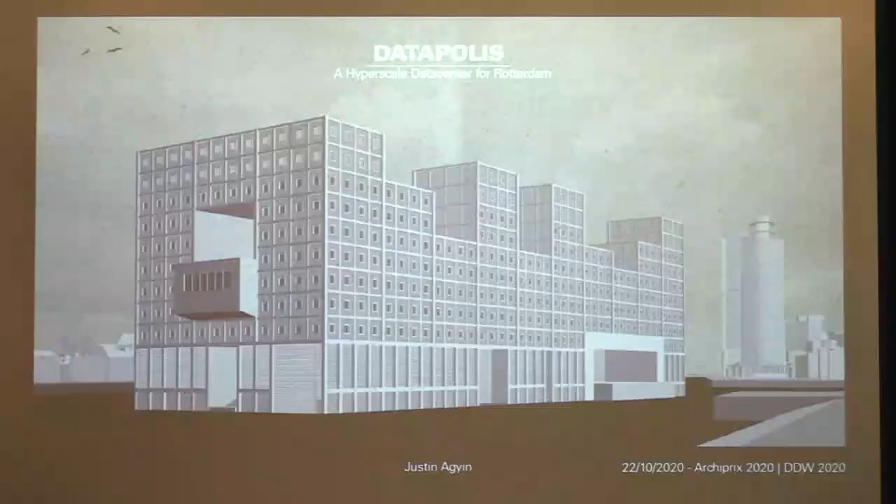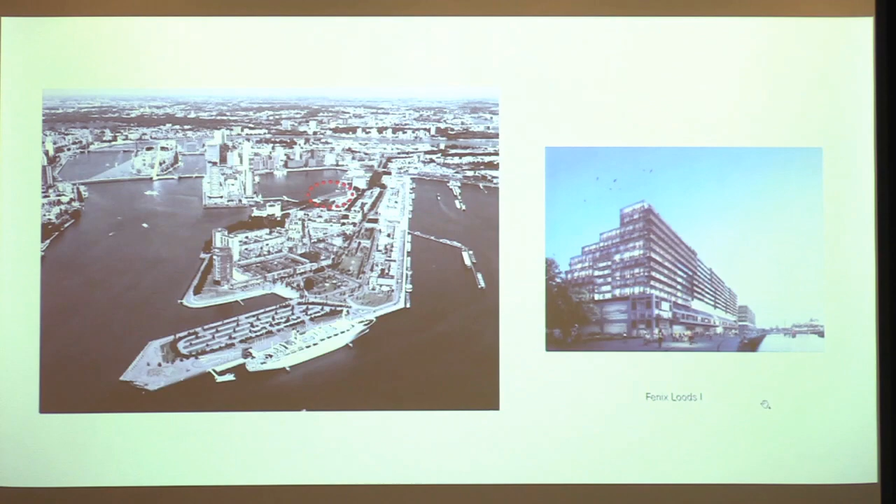And currently also Entree Katendrecht is realized, which is a high-scale and dense urban development near the metro station Maashaven.

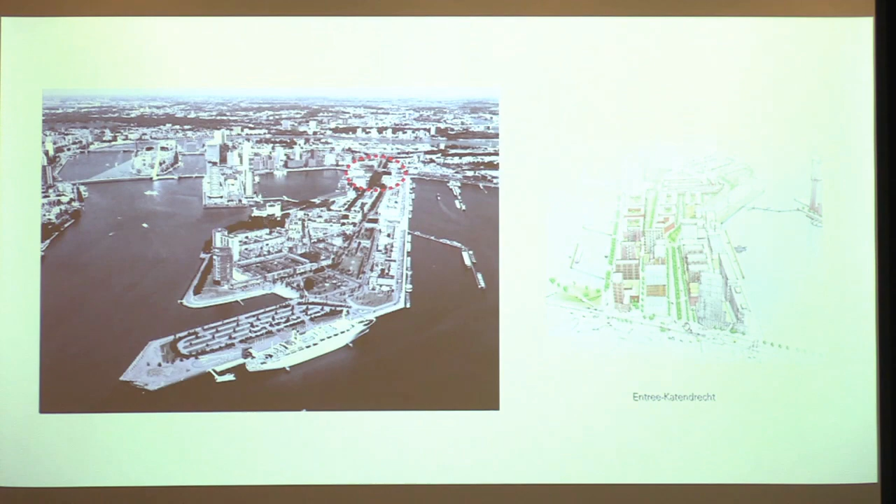What interested me in the location after research on Rotterdam and its relationship to water is how this piece of city actually was formed spatially but also socially, and how it's being transformed, and as I showed, the other half of the peninsula is still sort of up for grabs. It has been transformed over time gradually, but there were still some spots left that drew my attention.

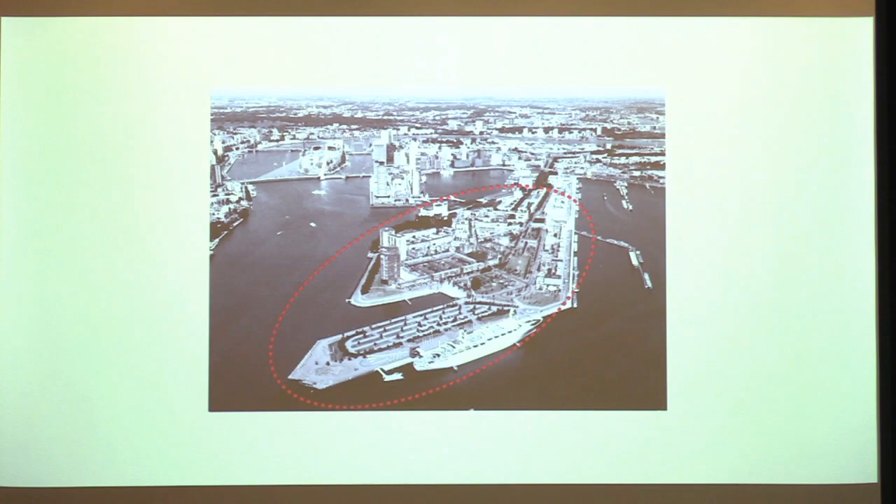So I tried to research how I could let the city, and Katendrecht in specific, re-engage with the water through architecture and the quay. And then particularly this part of Katendrecht, as the other part is currently being developed already.

What drew me, or what I found in the research, is that certain aspects of the water are very specific to Katendrecht, but also to the presence of water in the city, such as slowness, the vastness, the isolation and distance, and the stillness that it provides, and that the quays have a sort of pressureless quality to them, that everything is possible, but nothing has to take place per se. Which is a quality that stayed with me throughout the project.

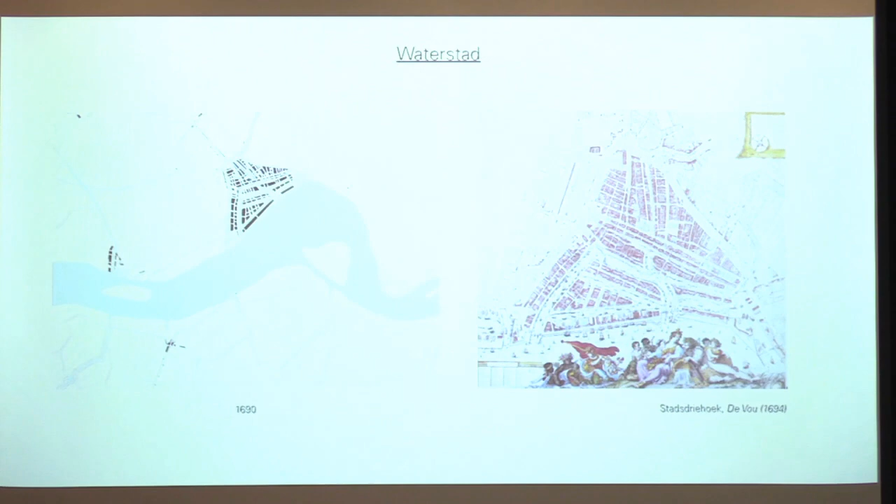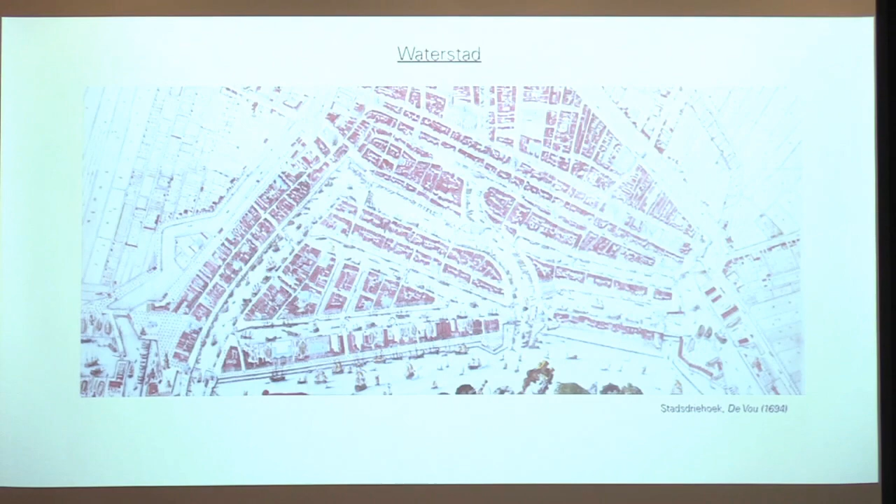How Katendrecht came to be was actually a radical transformation in the way port logic worked. It transformed from Waterstad, water city, which you can see here towards the end of the 17th century, that in the south part of the booming port city, there was really this mix between architecture, urbanism, and water. For instance, you see it here at the Boompjeskade, that you had a representative front towards the river, and then in the back you had shipyards.

And here you can see one of the most important public spaces of the city. Also the trade took place, the ships were there, and then here you had the representative front with the imposing architecture. Now the 19th century port was radically different in the sense that it was much more powered by machines, steam engine machines. These are grain elevators.

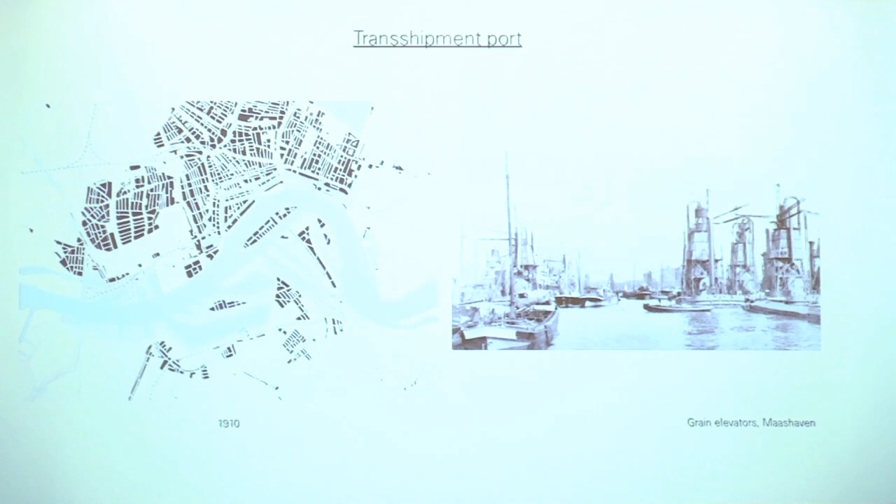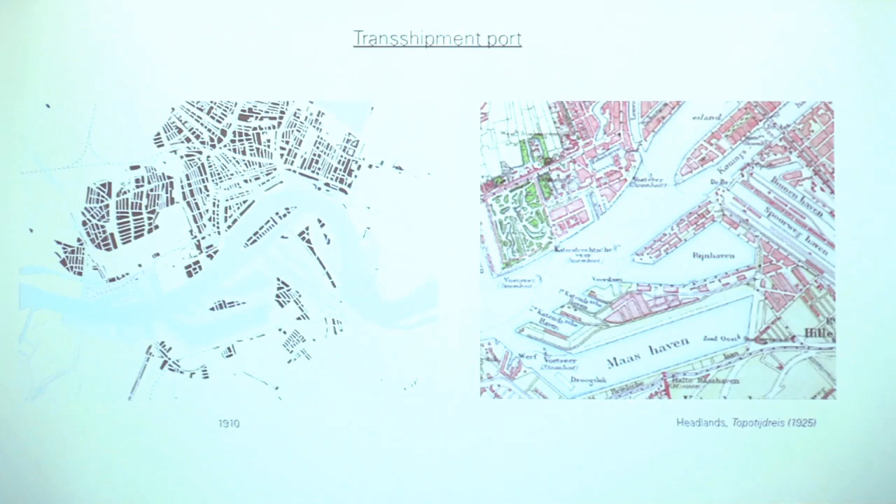And transshipment no longer took place completely between water and land, but also took place on water, and that's why they needed large water basins, and that's how Katendrecht came to be, because two large water basins were dug out, and then the peninsula was left, which was only connected to the rest of the city through a small path here or through the ferry.

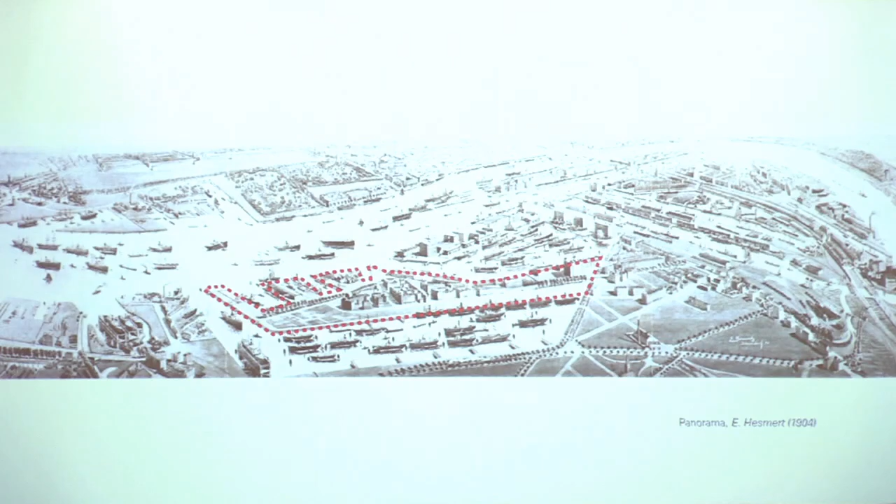Here you can see it in a panorama of the southern side of the Maas River of the city. And in this photo you can clearly see how Katendrecht as a neighborhood became an island isolated on a peninsula and was encapsulated by all kinds of port infrastructure and activities.

Over time this became not only a geographical periphery of the city, but also a societal periphery, because things like prostitution, gambling, opium use, and other activities that were sometimes tolerated but happen in any large city could take place here. Katendrecht, as a spatial location, allowed for those things to occur.

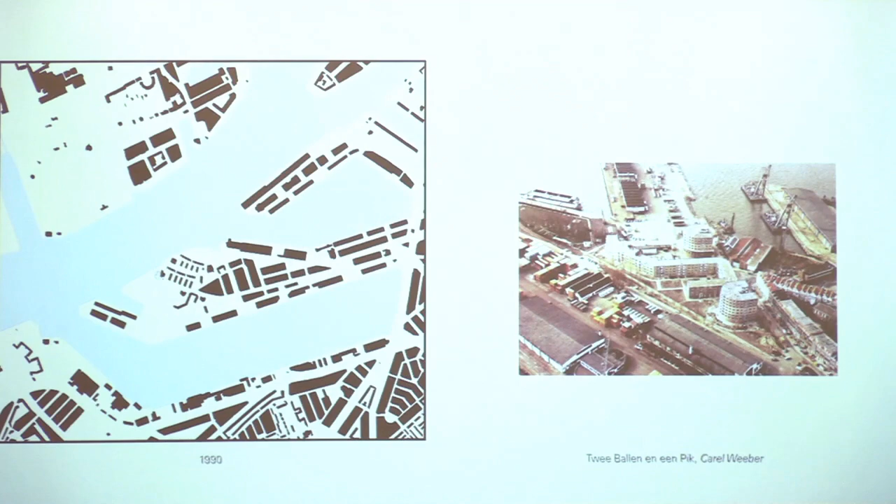However, the people living there eventually no longer tolerated this and wanted transformation. That's what gradually happened, starting towards the end of the 1980s. Transformations occurred and more residences were added, while port activities left — these were the first transformations. Then in the 90s and early 2000s, more transformations introduced new types of residents, usually people not necessarily affiliated with the port industry as was the case before in the historic core.

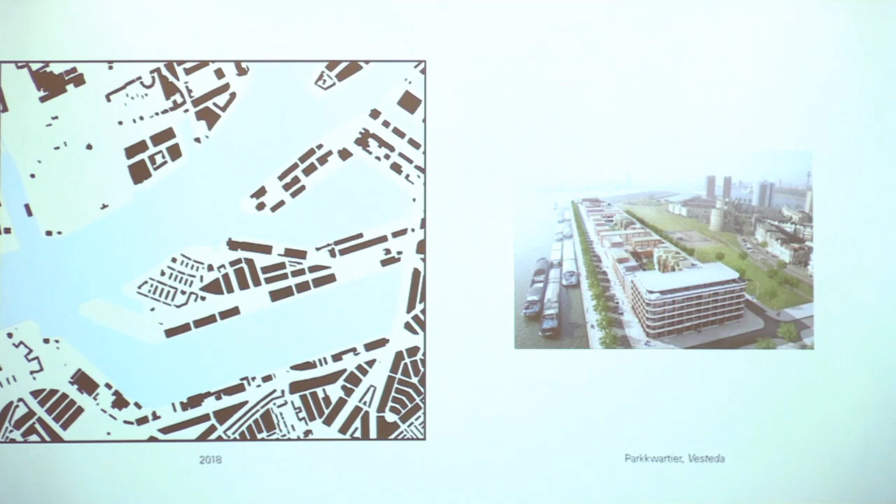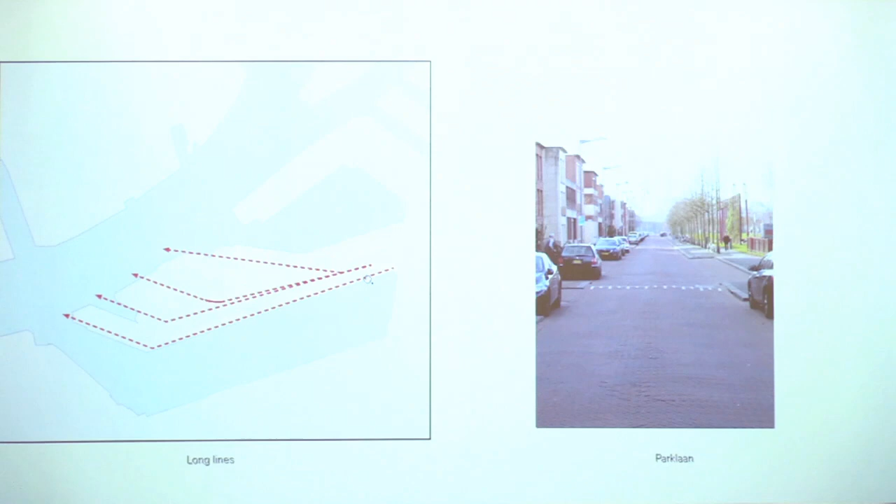These transformations spatially left an important mark on Katendrecht, resulting in morphological fragments. Between those fragments you have long lines of sight that were previously sightlines for the port infrastructure, mainly rail infrastructure, and perpendicular to that you have short cross connections.

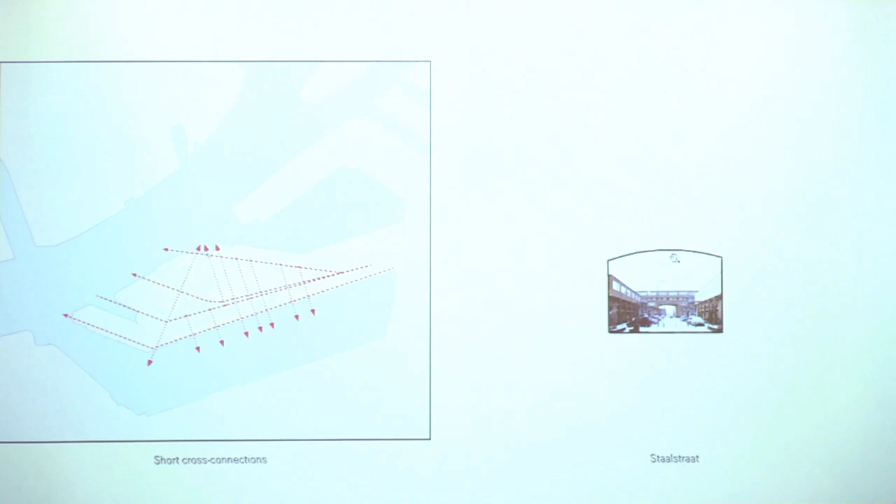The relationship between the urban and architectural situation is that sequentially you have this sort of encapsulated view provided by the architecture. As you move on, it starts to open up, and towards the edge of the peninsula you have these horizontal panoramas.

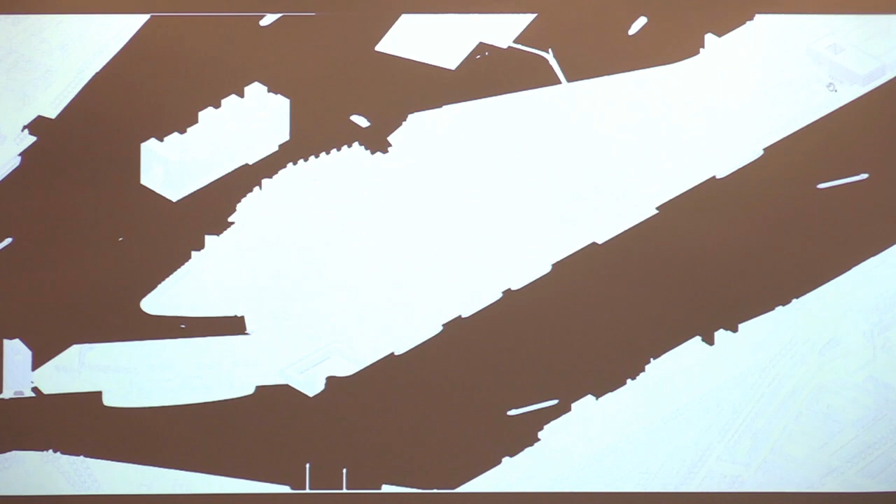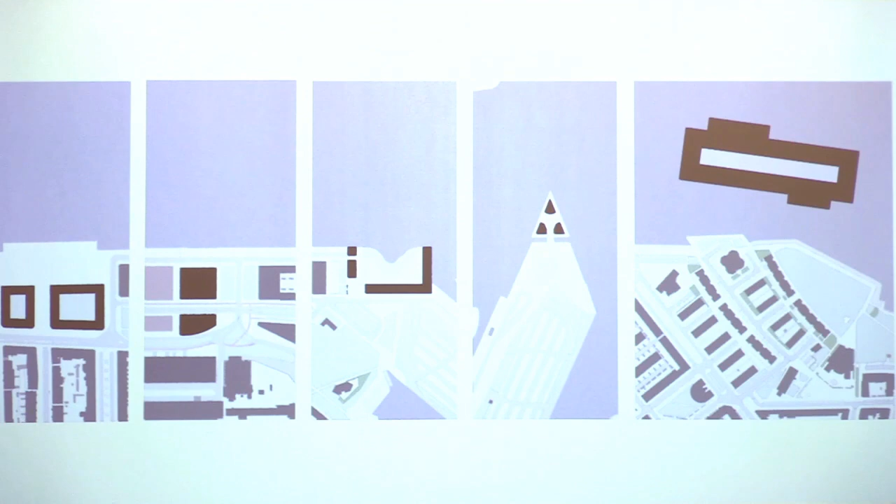These spatial characteristics of the location I tried to translate into architectural objects, introducing five objects between these morphological fragments that play into these characteristics, introduce a new program, and collectively migrate from land to water, from morphology to autonomy — together forming an urban strategy composed of five architectural objects.

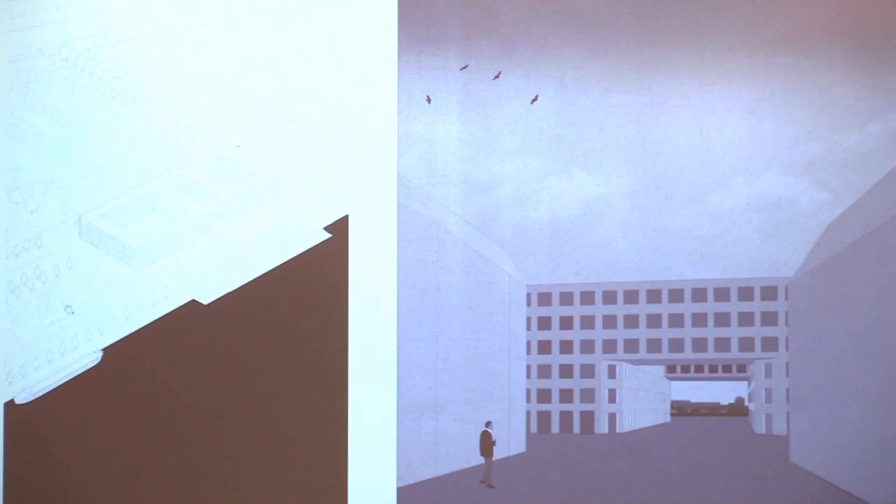Briefly, what they do is frame views towards the water and the remaining port activities there, and also introduce new program related to the context. For instance, this is a building block with residential units.

This is an office block that functions as a separation between this new development, the existing historic core, the developments from the 90s and early 2000s, and also this monumental grain silo, while also forming an urban square.

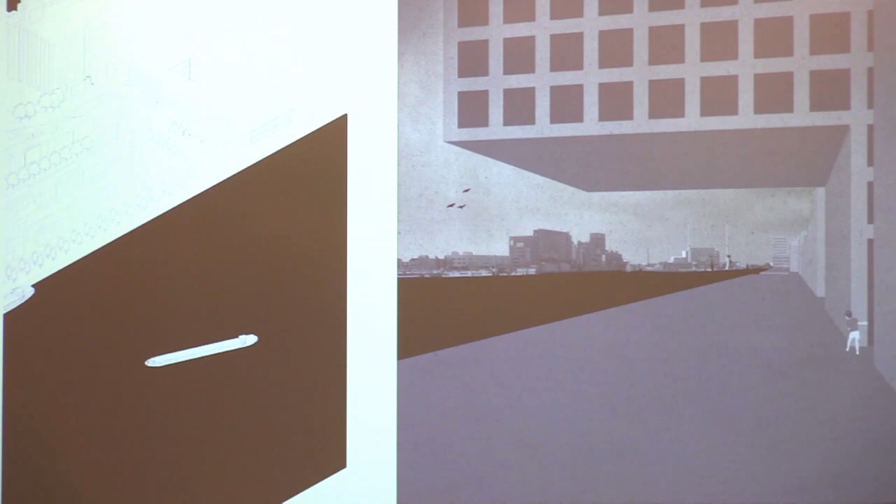Here is another residential building at this pivoting point between the residential area and the more open parking spaces related to the SS Rotterdam, providing also a soft quay so you can come closer to the water and enjoy it.

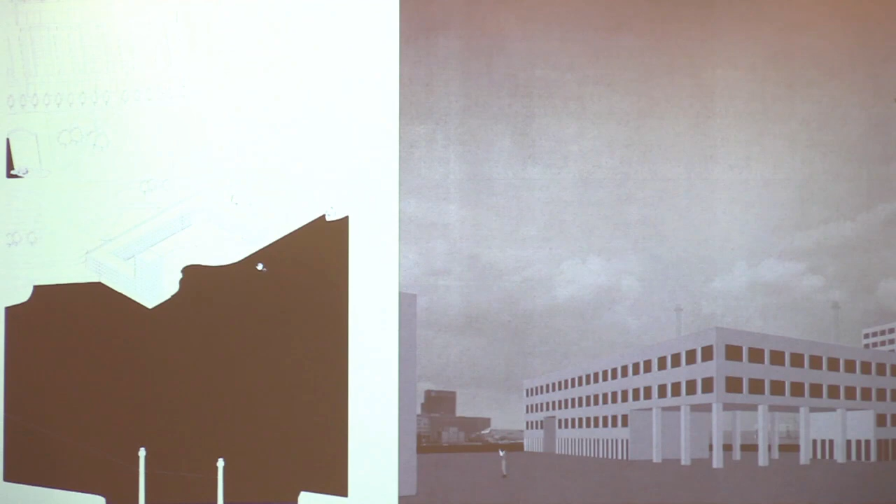Here at the tip, I completed the tip, and in the base of the building there's a water terminal where ferries, water taxis, and water buses can dock.

Through the building there's a cableway that goes from the Euromast to an amusement park, currently being built as part of this entertainment corridor through the city, also providing a new way to cross the water.

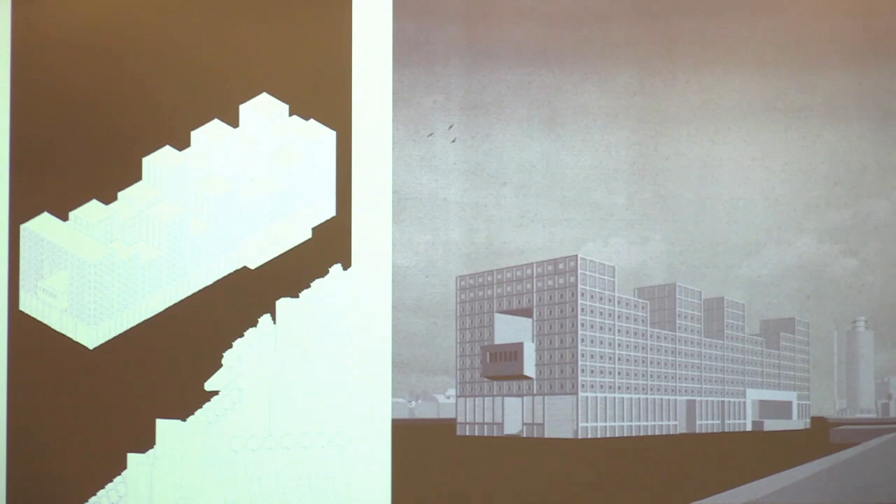Finally there's Datapolis, an autonomous building of 240 by 70 meters that houses a data center, a hyperscale data center, introducing a new type of industry in this former port area.

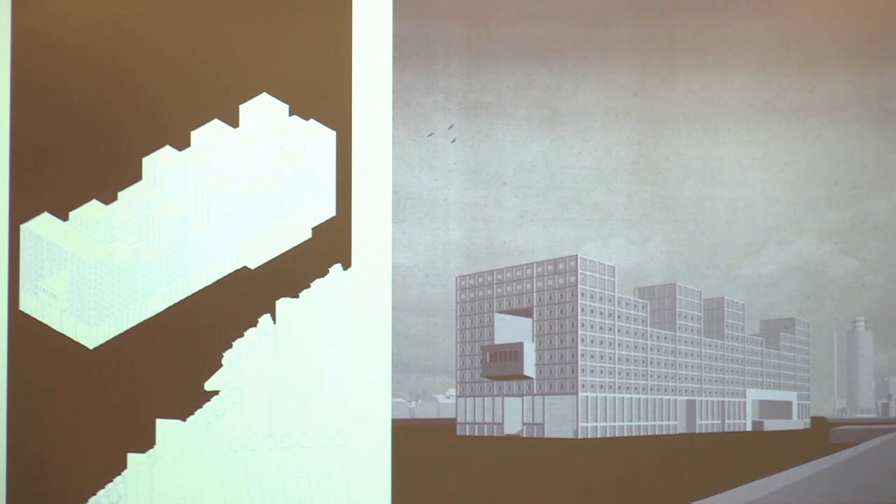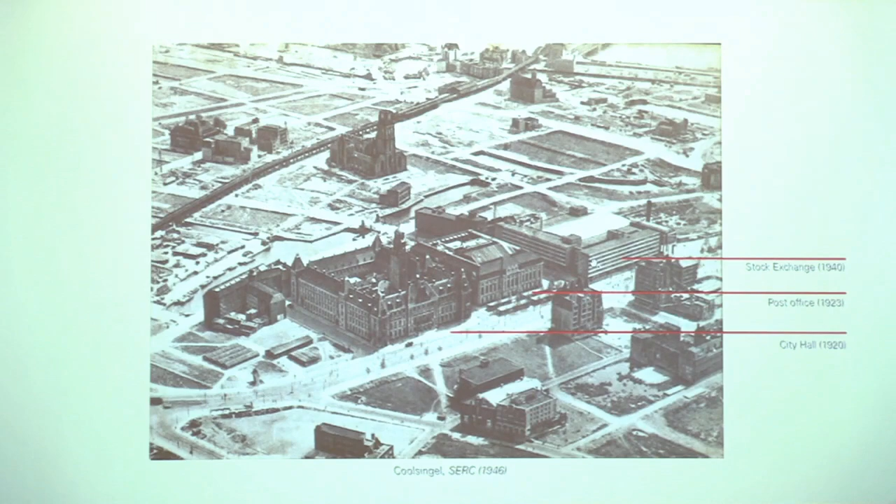One is the global interconnectedness manifested through architecture, which can be seen here along the Coolsingel, where you had the city hall, the post office which also housed the telecom and telegraph offices, and next to it the stock exchange. There are more examples in Rotterdam of how these global infrastructures and networks land in the city through specific types of architecture and buildings.

Another example is the Witte Huis, positioned at the corner of the river so that from each side approaching the city you could see it, also from the train. These technological infrastructures also provided new views and perspectives on the city, which were heavily used in cinema and other creative outlets.

Second is the collective celebration of technological progress. Rotterdam had a tradition of hosting, every five years, a large manifestation in the park, which is literally called the Park.

Rebuilding of the ports after the bombardment in the 1940s.

Then in 1955 there was a large manifestation on innovation in energy and chemistry. And in 1960 there was the Floriade, which gave Rotterdam the Euromast, a celebration of technological progress in the horticultural industry.

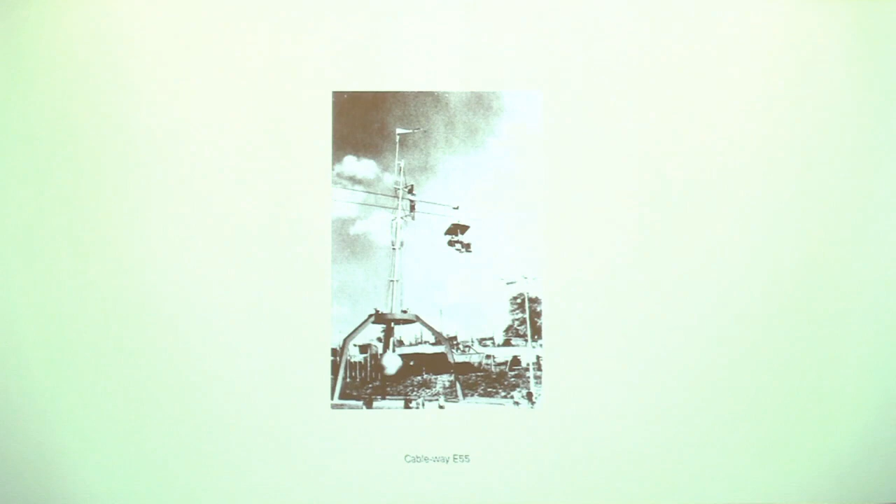Also prominent in the park was a cableway connecting north and south, which of course also resonates in my project.

The third theme is a bit more complex: emptiness. Even though the inner city has been rebuilt and is being densified much more now, there's still this quality or presence of emptiness in Rotterdam, which you can notice in a lot of places. It's entrenched in the city, in its architecture, but especially in its urban setup.

This had to do with the master plan, or basis plan, drawn up for the construction of Rotterdam's inner city, which was not a master plan in which parcels and building blocks were heavily defined. It was more about facilitating flows—offices, but also port industry and other developments—with quite a small role for housing actually.

But it also allowed for this connection to the water, the openness and vastness of the water. This was especially important to Van Traa, the designer of the basis plan. Later on it was of course blocked by new construction.

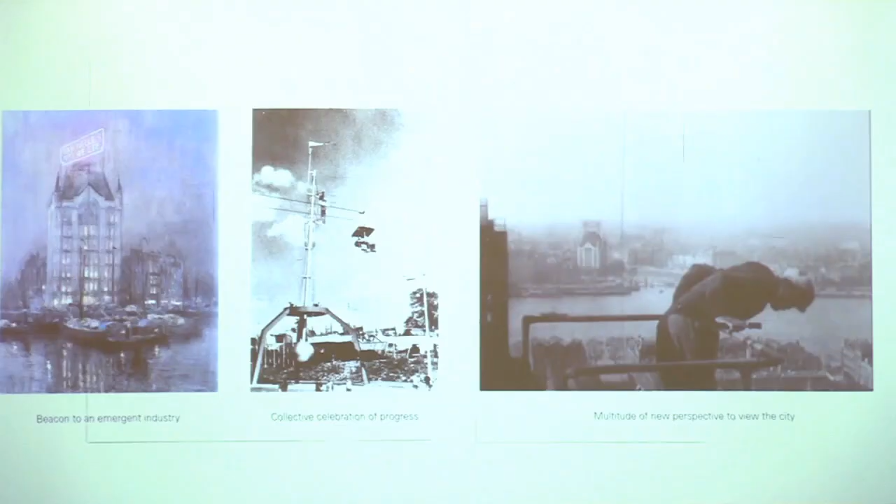So these were the three lines that led me to think about how this new industry, a data center, can benefit the city in different ways than only providing this new infrastructure, which is needed—we see it on a daily basis, but we can also hear it on a daily basis from all kinds of experts.

But it could also do something for the city: how could it be a beacon for this emergent industry, a collective celebration of progress, and offer a multitude of new perspectives to view the city?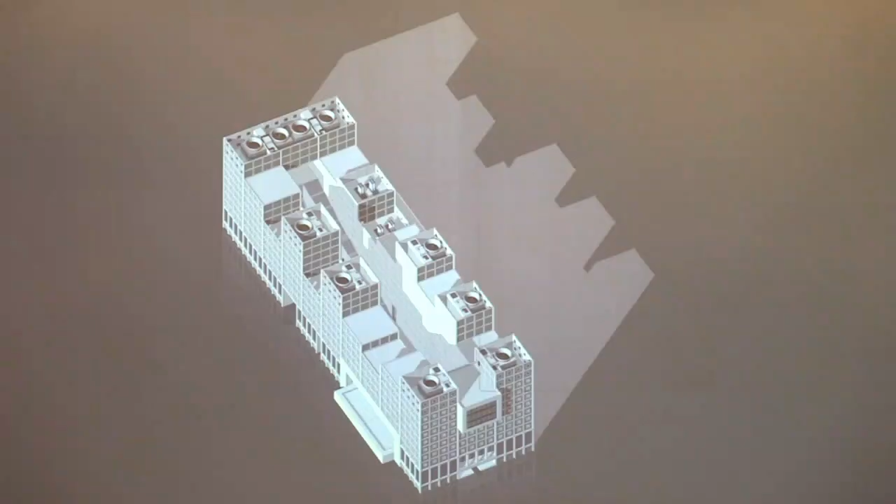So that's what I try to achieve through my design—a double role for this building, housing this new industry while providing new urban aspects in an architectural object. This is reflected here, for instance, in the plan.

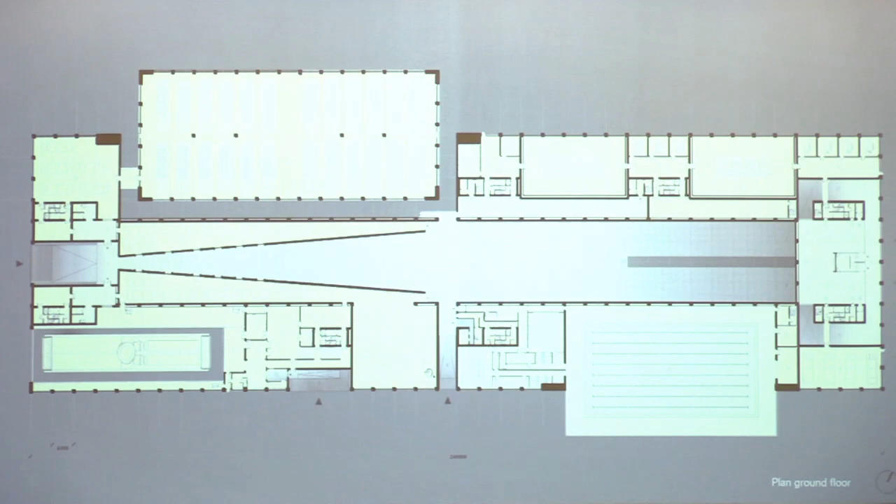I will briefly go through the technical aspects of the data center. Here is the ground floor plan: the loading dock, the generator room, air handling units, and power substation.

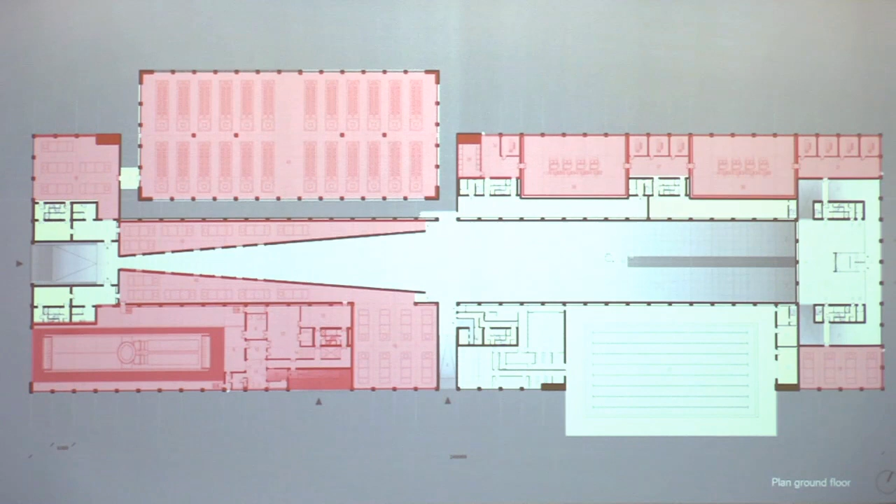The ground floor is mainly occupied by the technical apparatus required to operationalize this type of data center, with entrances on the north and south ends of the building, and also one on the side towards the central void, which I will discuss later.

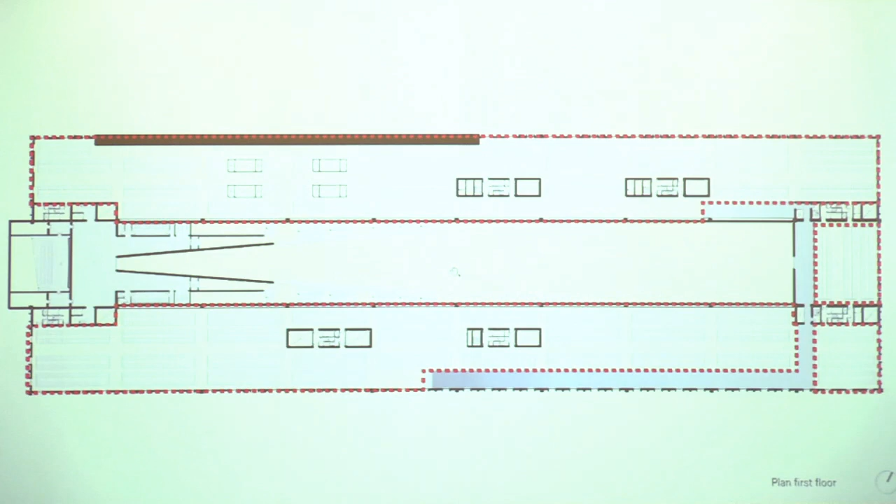This technological presence is also reflected in the building. In the base, there is a continuation of air vents, sometimes interrupted by an entrance. In the midsection you have large server floors, large open floors with server units.

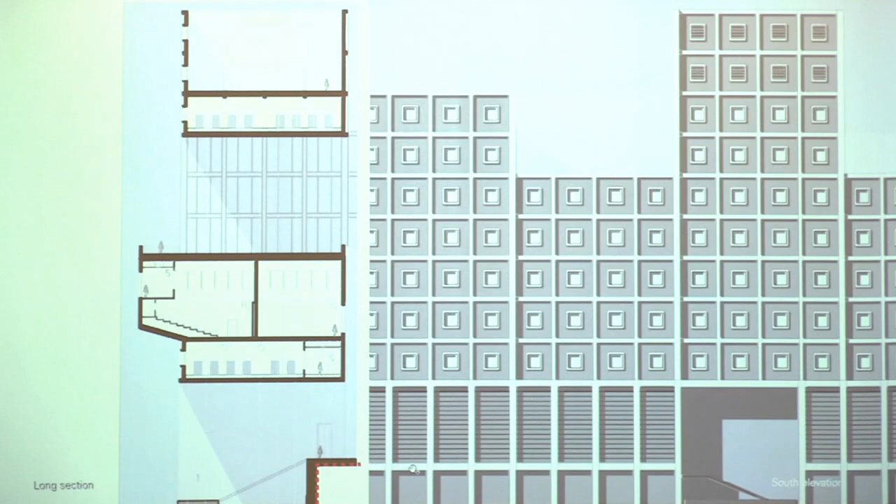In the top of the building, the top 2 floors occupy cooling towers, and you see air vents coming back there again, but smaller and encased. In the basement, there's also a water plant, because it's a water-cooled data center.

As I mentioned earlier, I tried to introduce the public domain in Datapolis so it becomes more than only a technical machine in the heart of the city. I did this in three ways.

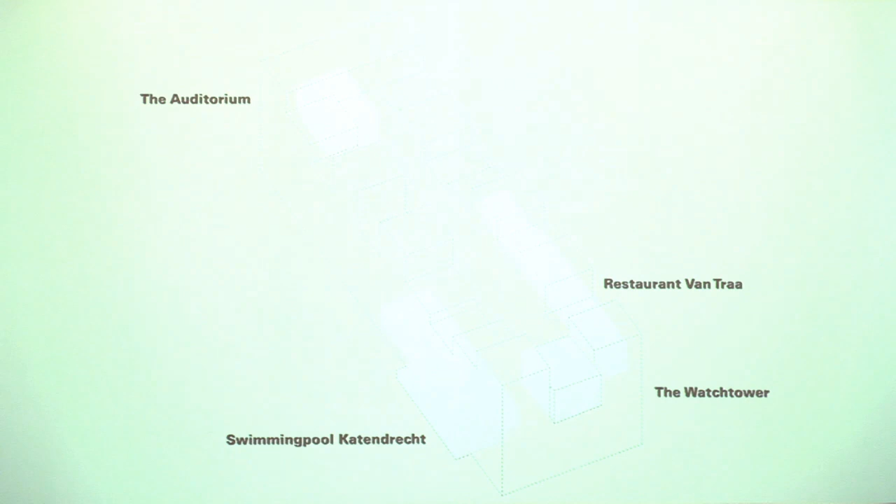One is through the introduction of four distinct public functions: a swimming pool, an auditorium, a watchtower—which has offices and a control room—and a restaurant. Each one protrudes through one of the elevations.

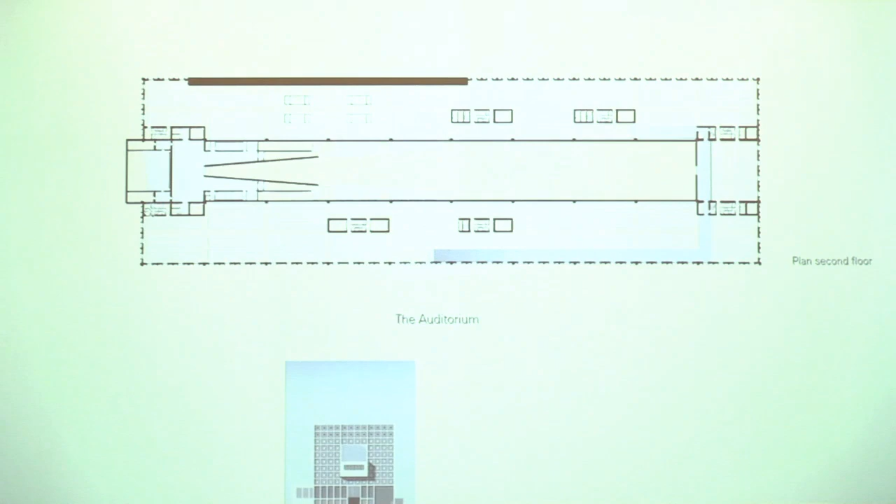Here you see the swimming pool on the ground floor. On the 2nd floor there's the auditorium, which you can reach through a monumental staircase in the center.

On the 5th floor you have the watchtower with offices and a control room, and then a restaurant overlooking the city, providing a view over the city in contrast to a view on the water, as was important for Cornelis van Traa—hence the name Restaurant Van Traa.

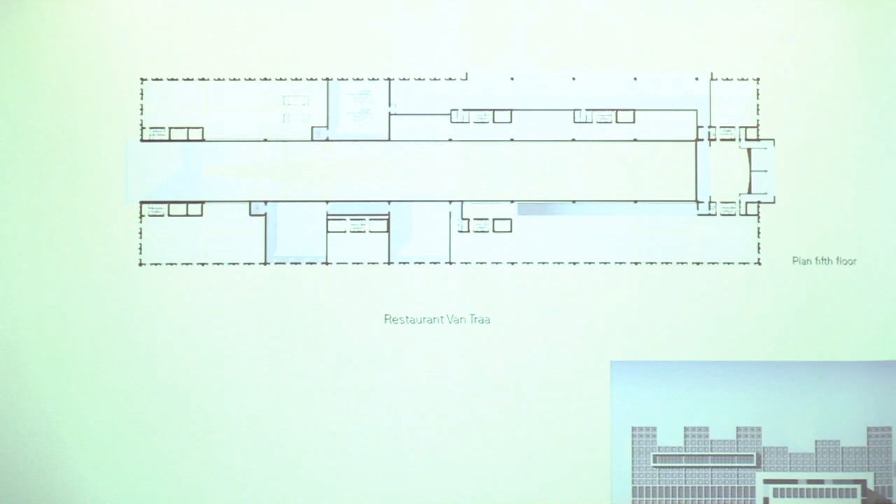These are connected through a public route—here is the swimming pool—and the public route also allows views into the enclosed spaces where you are not allowed as a visitor: the server spaces.

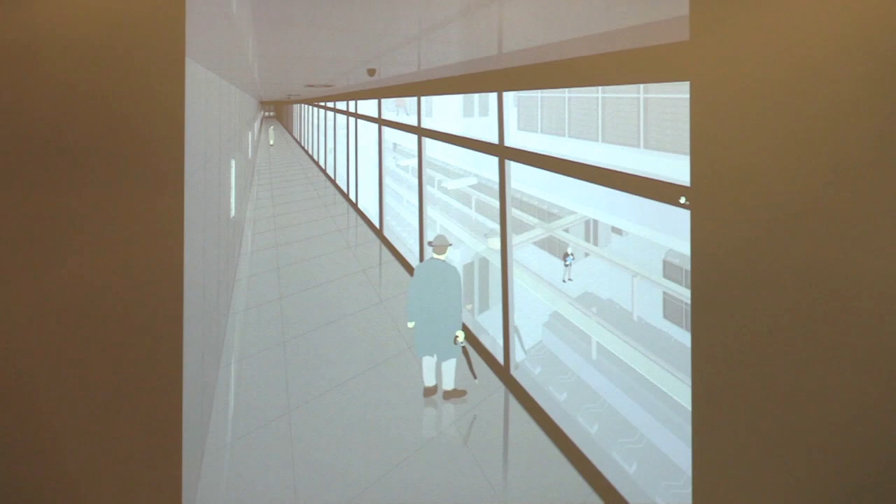Then you go to the auditorium, and here there's a large deck from which you can also again view the port in the distance. This is the control room. And then you end up in the restaurant overlooking the city.

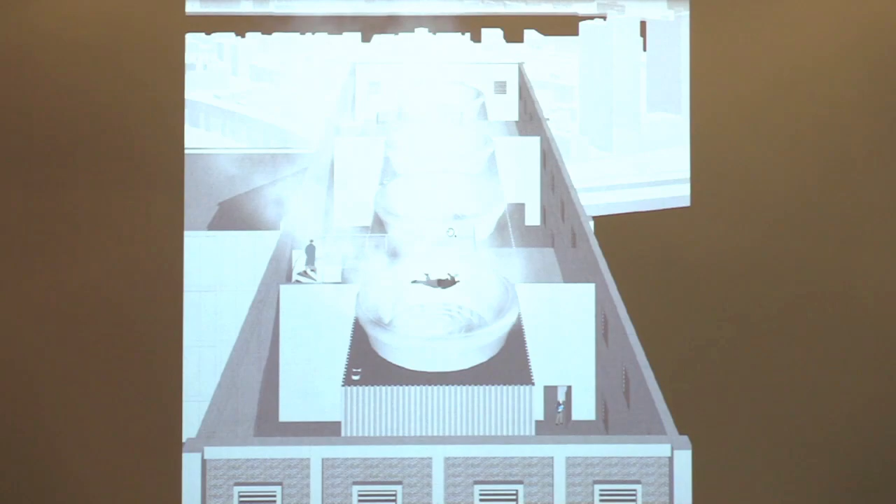You can from there go over the roof landscape and experience the cooling towers, and then revert back to the central void. And then the central void in particular is

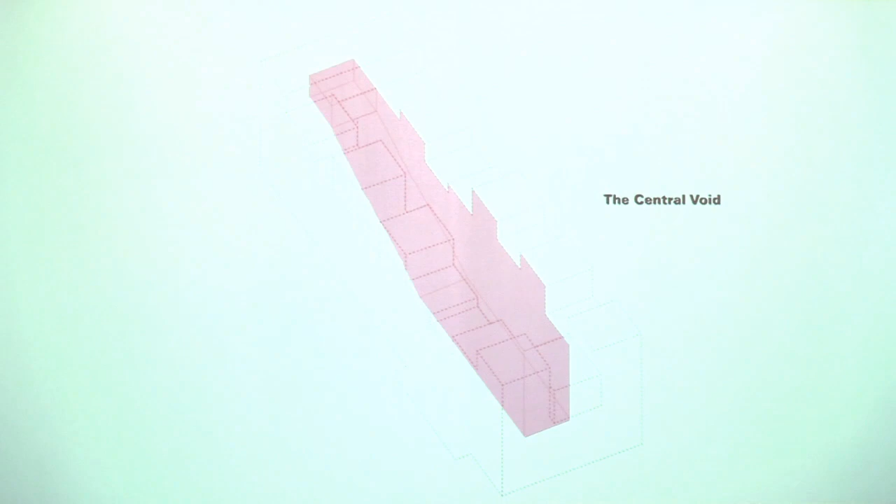sort of an antidote to this hermetic logic of a data center, in which everything is controlled climatically, but also who is allowed in and out. The idea of the central void is to be a poetic counter answer to that by offering a permanent public space in which everything can take place, but nothing has to, a bit like the pressureless quality that quays have in Rotterdam, some of which haven't been transformed yet. There's not necessarily a function there, but you are exposed to the elements, and it is permanently open without fences, doors, or gates. That was my presentation. Thank you.

There's only two of us, so it doesn't really echo the clapping, right? But thank you, Justin, for presenting your project. A little bit too long, but I guess we'll make do with that.

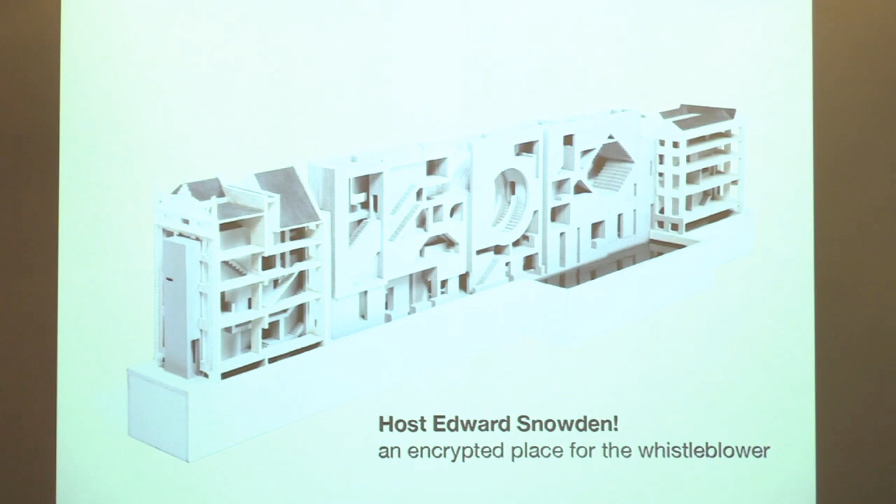Achterhuis has a new title in the meantime. It's called Host Edward Snowden, an Encrypted Place for the Whistleblower. That's because this will also be an entry for the Archiprix International, and Achterhuis might be a difficult word to explain, but I will come to that later.

For me, it all started with this documentary about Edward Snowden, Citizenfour — Edward Snowden, the whistleblower who revealed the reality of mass surveillance and data exploitation by our governments and trillion-dollar companies like Google, Apple, Verizon, Amazon. You can fill them in, which is of course a grave violation of our right to privacy.

This subject really fits into my own practice, which I started in 2015-16, and it's pretty much embedded in social, political issues, political context. So you can read my project as a spatial manifesto to address important terms like transparency and the right to privacy in a well-functioning democracy.

I'm not going to explain my whole building because I want to leave a secret, of course. I'm not going to explain exactly how it works, but believe me, I know the meaning and function of every space in my building. I'd like to talk this afternoon a bit about my process, because it's pretty important for my practice.

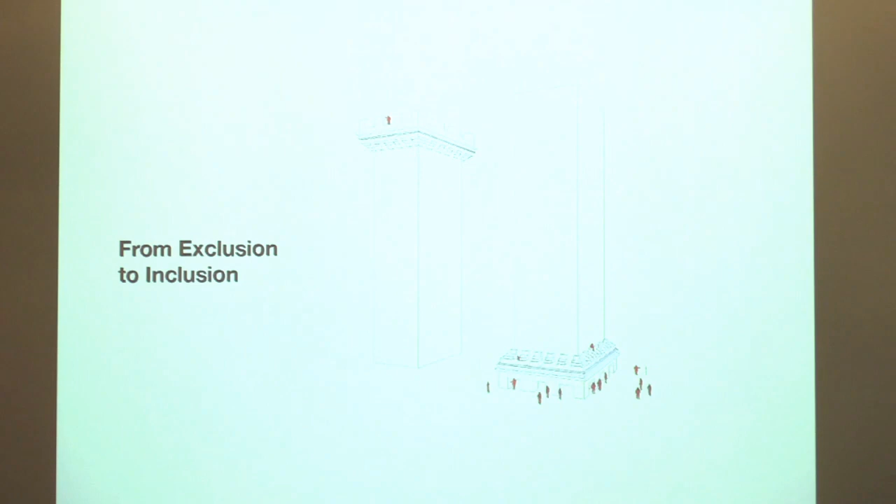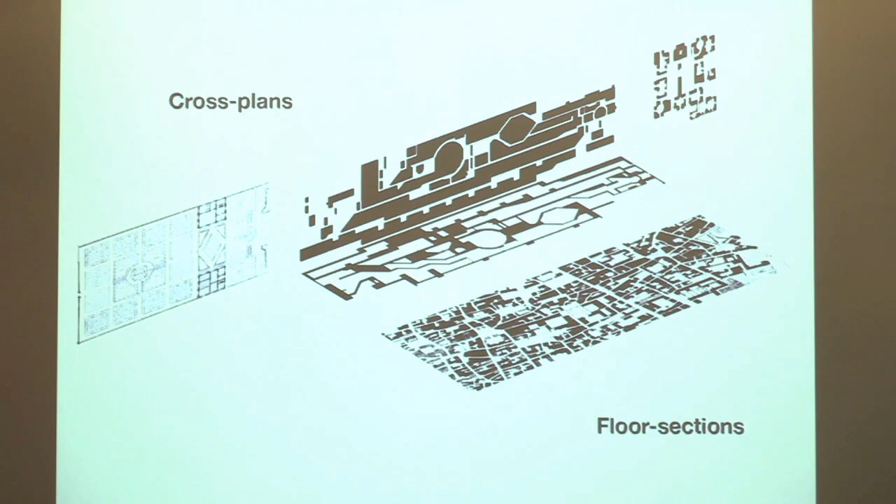Well, here, you recognize it again. Here it comes all together, and what I did is I was making my whole design on the flat surface, and then I rotated it 90 degrees, so a square becomes, for instance, a space.

This was a perfect occasion for something I never did before, but let's call it an academic exercise, a mass void study, by making matrices and molds and then casting with plaster and concrete. It's good to mention that at this point I didn't have a program and I didn't have a location. Maybe you're waiting, where is this building situated?

But it was more or less on purpose. I always want to start a project first with my imagination and an interpretation of the subject and certain architectural principles. Then later on in the process, I want to focus on the more practical and technical parts that also come with architecture.

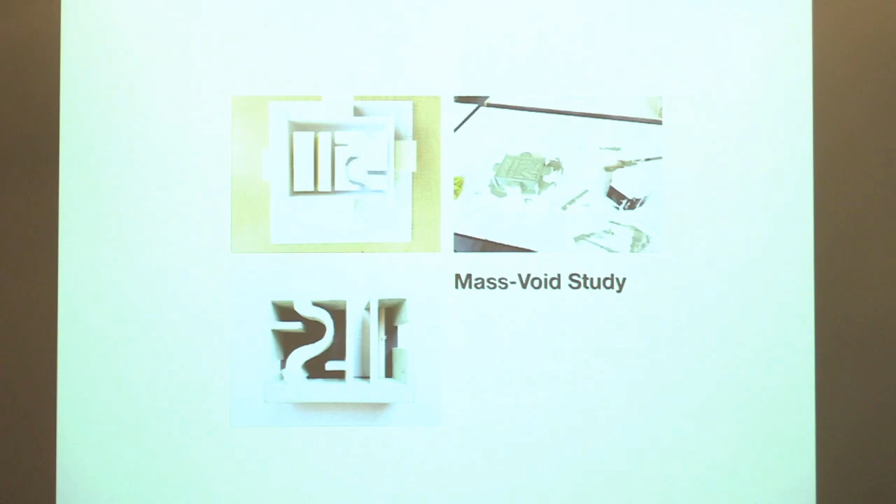Of course, it was not coming out of the blue totally. I already had ideas in my head about what kind of building I wanted to make. It feels a little bit like working as a scenographer or as a movie director with different scenes, and how they come together, that was something I had to solve in the end.

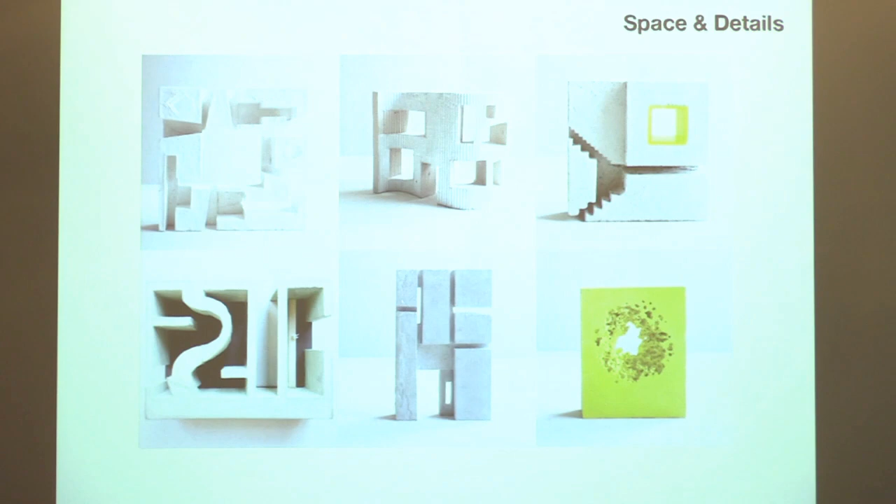So I started with different models, positive and negative, with sequences of spaces and disorderly organized spaces, and so on. I was exploring with this casting process, exploring as well spaces as details and materials.

In the end, I had quite a table full of models, building up an archive or a cache, as I called it, for myself, to analyze and look back at how I can compose a building out of all these elements. In the meantime, of course, I came up with a location and a program, but that came along with the casting process.

I'm just giving one example here, the circular space, which became the central space in my building. You can call it a belvedere because the public can go up there and take the stairs. You come onto a platform 5-6 meters high, and you have a very nice view on the garden where my building is projected.

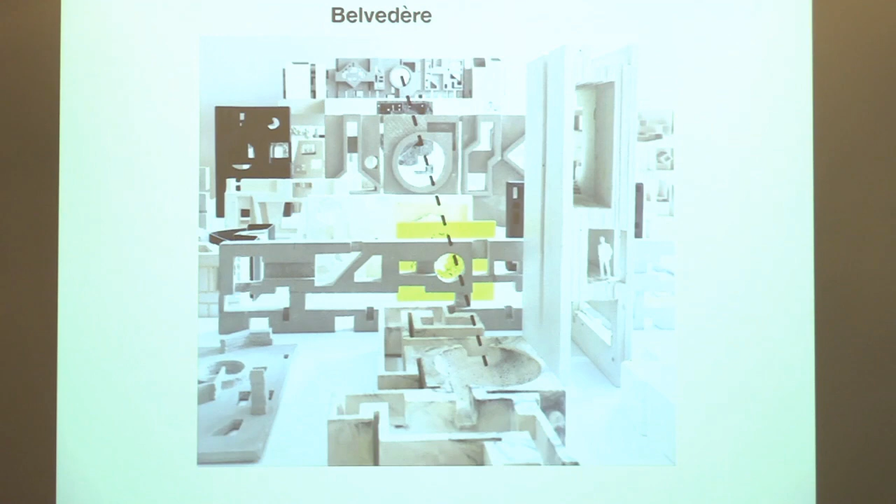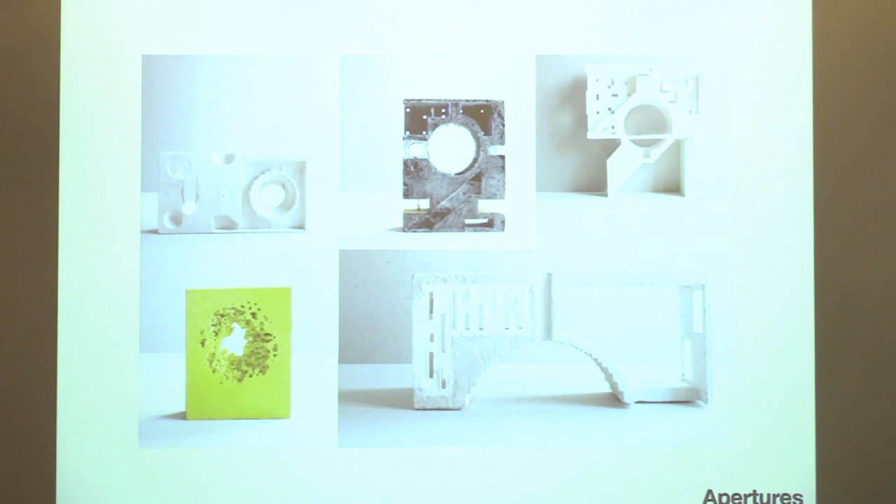That was quite logical because apparently here you see some examples where the circle is appearing. I had a preference for rhombuses and circles, also thinking about how it can be appropriated, especially by the public, because I want this mix of the host Snowden and the public going through the building.

The paradox I was talking about is pretty much in my process as well—it's constantly shifting between analog and digital. You can call it a dichotomy, and maybe if you talk about Edward Snowden it would be logical to dive more into the digital.

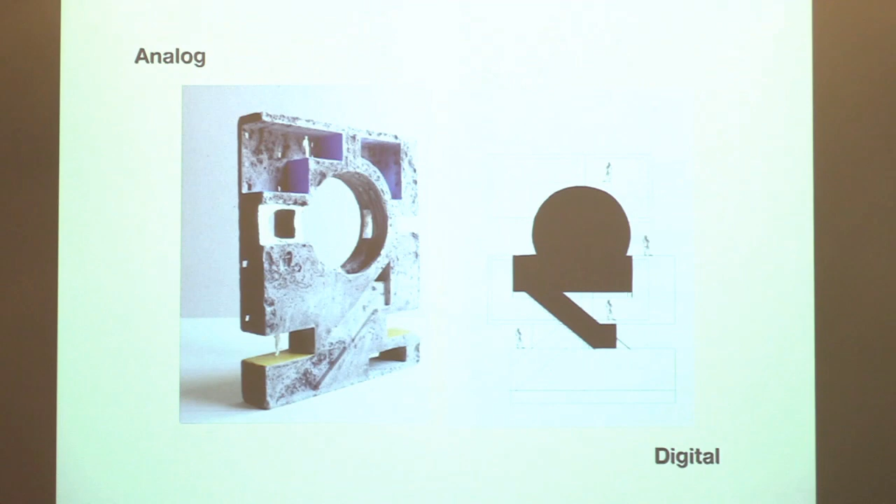But I started with this method, which is very analog, and left the computer completely out this time—only at the end. Here on the left side you see the model. What I did was put it on the scanner and trace it in AutoCAD, adjusted a little, did some corrections to proportions and dimensions. In the end my model was so complex that I had to produce my final models with the computer.

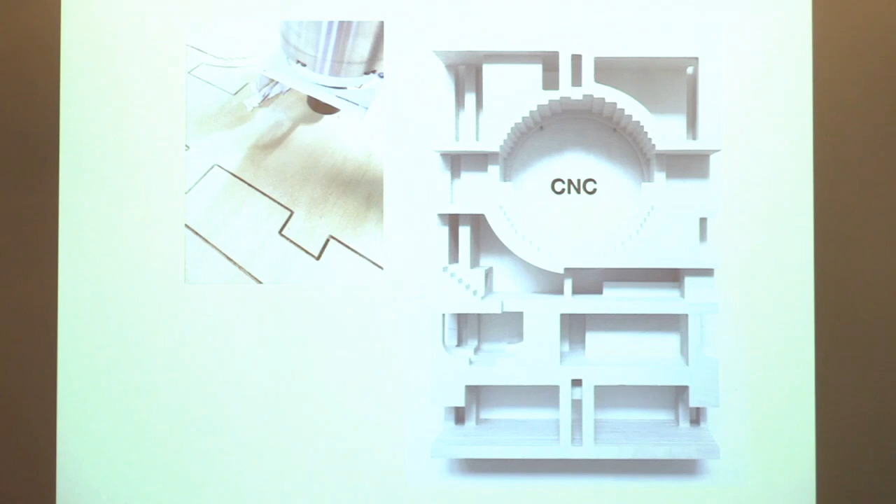And I had the drawings for the laser and CNC cutters. In my process, spatial encryption became very important—that word is now also in the title. To trigger my own imagination, I started introducing the vocabulary of the internet or digital world, not in a very precise way. I'm not an expert or a scripter for websites, but more loosely, and it really helped me translate this into architectural equivalents, to think differently about my program and building, and trigger associations, which is important for me. So firewall, host, and protocol all became architecture in my project.

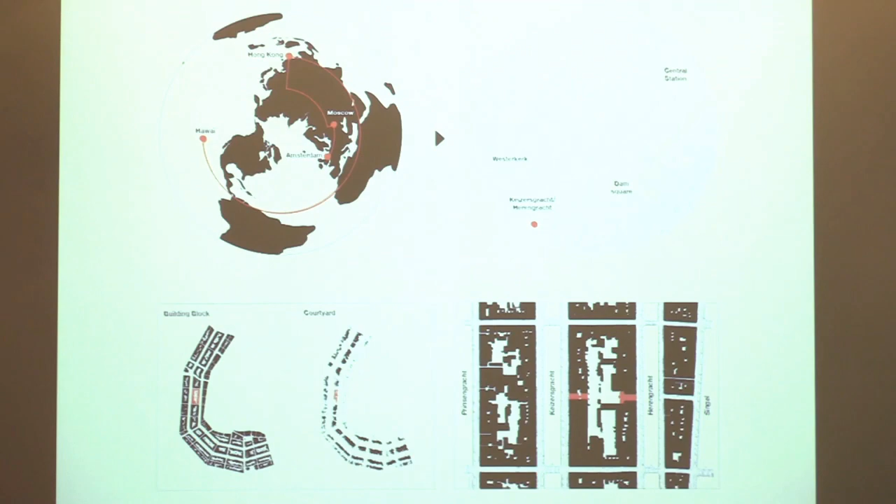Then shortly about my location—I projected it in Amsterdam, following Russell Shorto who wrote the book 'The Most Tolerant City in the World.' Let's face it, and I projected it in the center of Amsterdam. I found the inner gardens at the closed building block in the canal belt a perfect place to hide. Of course it's also a little wink to the history of Anne Frank, although the Achterhuis is not an Anne Frank invention—it's an Amsterdam typology.

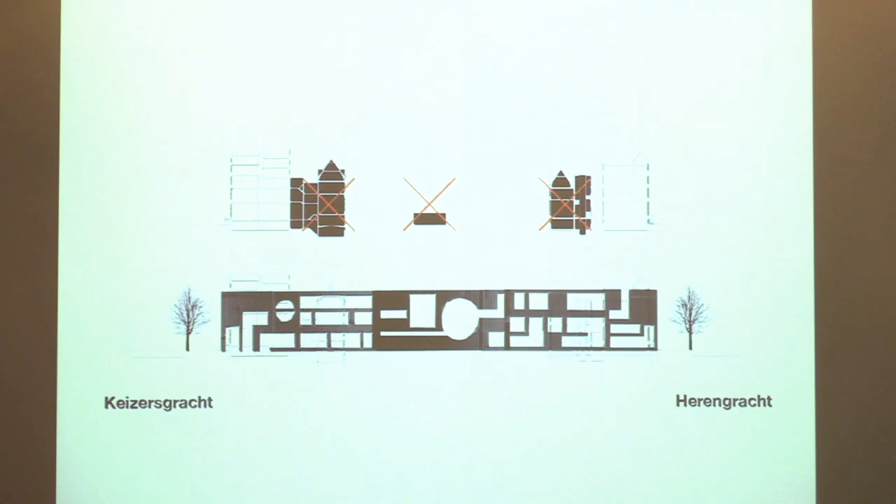The Achterhuis is difficult to translate—as I said, it's the house at the backside, facing the garden. So what I'm literally doing is taking away the existing Achterhuizen and replacing it with a new one connecting the Herengracht and the Keizersgracht, connecting two canals. It cuts through the house in front, and has a secretive appearance at the canal side.

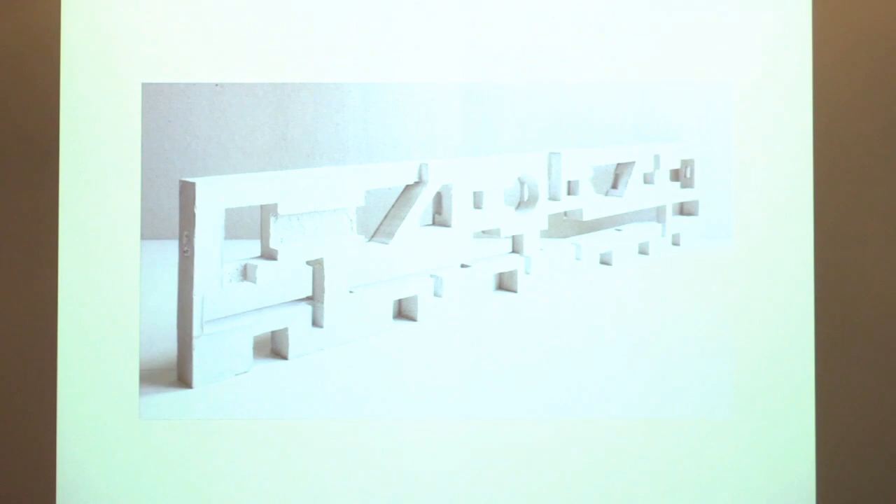Then I cast my conceptual model again, now projected into my location model. Here you see what I call the interface, the incision in the classic facades of the grachtenhuizen, the canal houses. On the left side is a sort of copy of the existing staircase leading to the house itself. It's not only for Snowden, but also his guests, friends, family, activists and hacktivists visiting him. I added a janitor and a cook to the household, so three people are living there. On the right side of this monolith block is a sort of secretive entrance for the public.

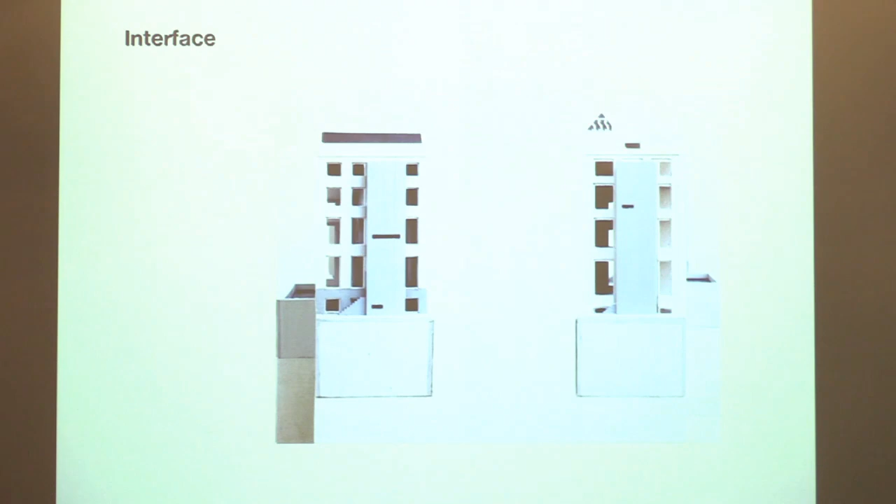Thank you for that very thorough presentation, although you didn't talk about what you said you weren't going to talk about. But what you did talk about, the process, was very thorough and explains a lot from what we can already see from the exhibition, but also what you showed us today. These are two very compelling projects—they seem to have a lot of moments where they touch upon each other, but also moments where they seem to diverge.

If I had to put it in simple terms, there's sort of a celebration of technology and somehow a rejection of technology. Oh, no? No, so please correct me. Go ahead. No, it's not that I'm against technology at all.

Of course, it's nice we have Skype, and now in Corona times we have Teams and Zoom, and so on. I'm pretty much in favor of technology, but one thing we forget is that in the innovation of technology, we always forget to define the moral code. I think it's strange that cars and computers, everything is moving so rapidly forward in progression, while our regulations, conditions, and the law are static. That's very strange.